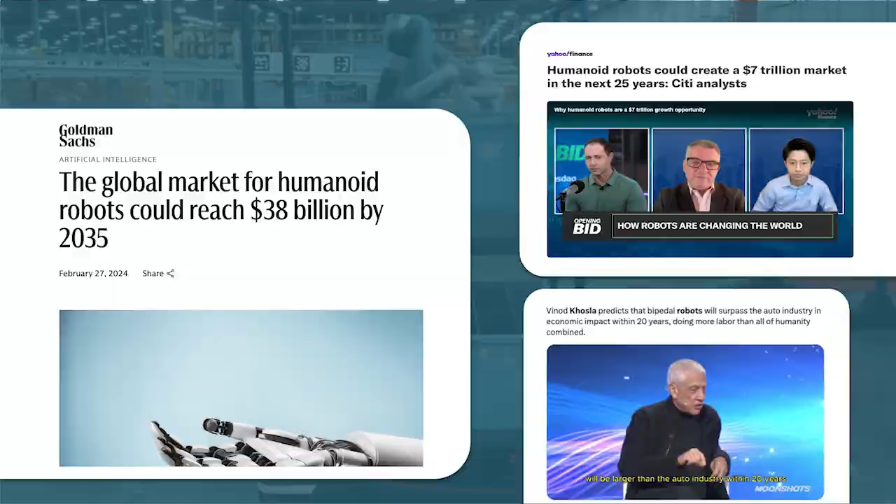So we basically spent a few years and looked at hundreds of use cases to find the right match between the technology that we knew was going to be generally useful in the world in some way, and a market where we're going to be able to make money at the very beginning - like a beachhead market, right, to get started.

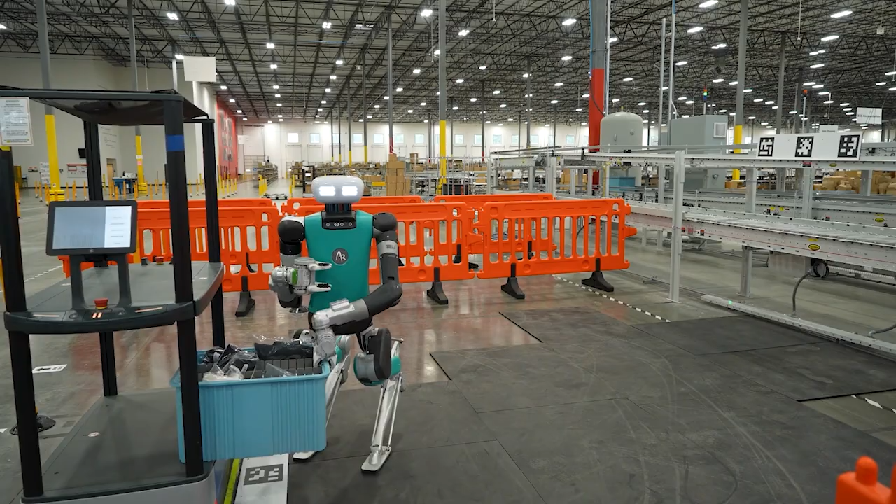And we found really that moving totes in warehouses is the right match. It's just something that a humanoid robot that we can build will do useful work now and early. And then this is kind of how we get started.

So humanoids are going to start in these industrial settings, and we'll talk about why - logistics, manufacturing, that kind of thing. And then quickly expand to other industries that are less structured, require a lot more generality in the perception, the intelligence, the decision-making, but also the manipulation, the locomotion, the mapping, navigation, everything else that it needs to do. And it's going to require safety - that's a really, really big deal, and we'll talk about that a little bit.

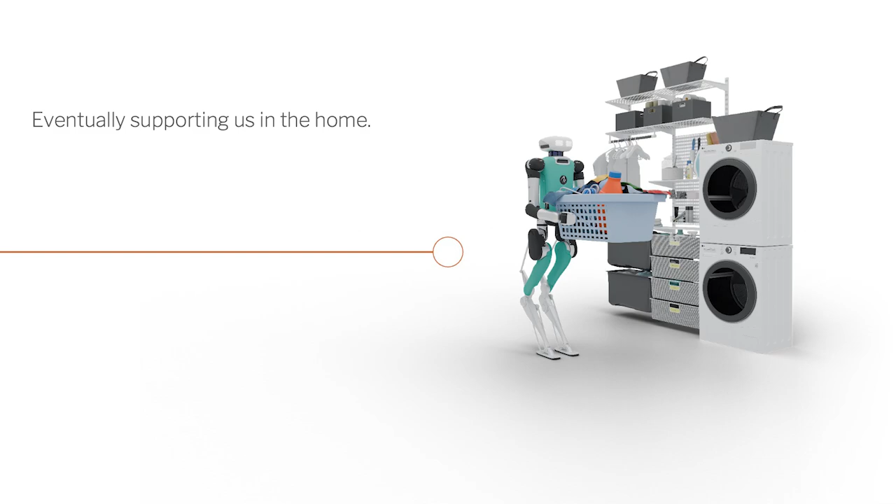Eventually we'll get in the home, but we're really not there yet. And I heard someone the other day say, until you can prove that the robot is not going to fall on a baby, it's not going into the home. So that's a pretty high bar. It's going to be a while, but we'll get there.

Just to be clear, the home is the very highest standard of safety, capability, manipulation - and maybe I'll say safety again. The warehouse is just how we start practicing that. Okay, so that's how the industry looks. That's how we see this opening up.

But about the robot - I'm going to talk about what a humanoid will look like that's going to enter this industry, and not necessarily just our humanoid, but kind of first principles, physics reasons why it, first of all, can look sort of humanoid and is useful for that reason, and what its features will be.

Similarly, I'll talk about what an embodied AI looks like, what the kind of structure of that AI looks like. And again, I'm trying to look at it from first principles. This is not just an engineered system that we built - it's how all of them will look, for reasons that everybody shares.

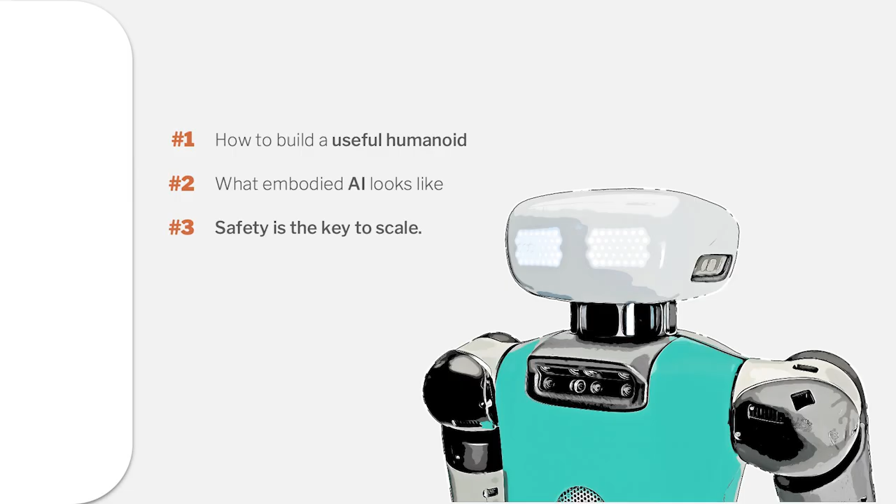And then I'll talk about safety and why you really have to overcome that hurdle before it's possible to scale. All right, so story number one: how to build a useful humanoid.

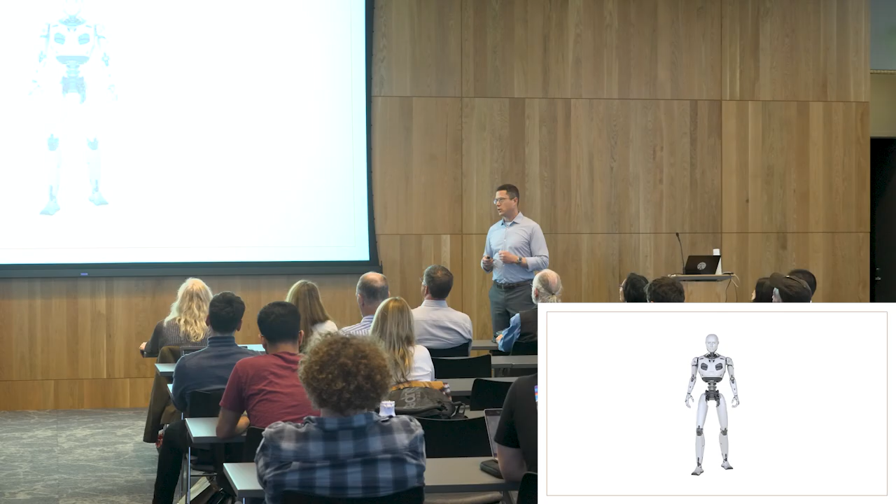It's not going to look like that. There is no reason to build a robot that looks just like us, and that is not what we're trying to do. We are trying to build a robot that is multi-purpose, that can operate in our spaces, that is human-centric. And because in the built environment there are so many different use cases and tasks and things you can do, the way the space exists, having a robot that's roughly our form factor, but more importantly can also follow the same workflows and do the same kind of manipulation - there's a lot of opportunities for multi-purpose.

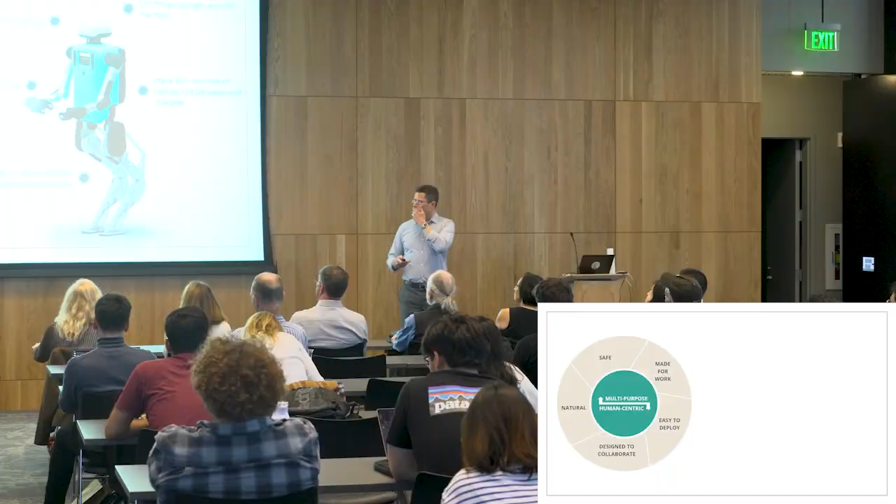It's a really big opportunity for a form factor like that to be multi-purpose. I can't think of another way that you would have a machine do so many different things, because we've designed the world around us. But when you really dive in and start to look specifically at what is it going to do - we talked about moving totes in a warehouse as a starting point - and then that leads us to some actual requirements.

So we're kind of spiraling in. This is why I said it's a match between the technology and the use case. You don't start with the use case necessarily, and you don't start with the technology. You end up trying to find that match.

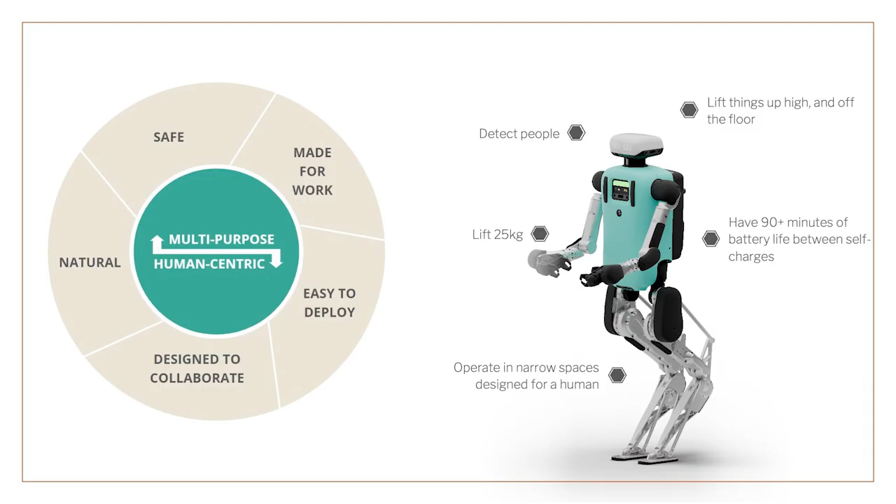So for this use case, we have to lift 25 kilograms — that's like the OSHA regulatory limit, which is what a lot of warehouses and factories use. We need to operate in narrow spaces, little aisleways, because a person can go there. And be able to reach up high.

To lift things up over about 6 feet high and pick things up off the floor, it's got to have this huge workspace, which is really one of the advantages of this humanoid. It's going to need at least 90 minutes of battery life between self-charging. And all of that starts to really constrain what the machine is going to look like and what it's going to do.

So the first thing is, if you're in a narrow footprint and you have to reach up high, it's going to need to be balancing — dynamically stable, just like people and animals are. A lot of robots are statically stable, like a table or a chair. The problem is, unless you've got a really big, really heavy base, anytime you lift something a bit heavy, the robot's just going to tip over.

But if you're balancing all the time, it's fine. You can get under it and change your center of mass to be underneath your combined center of mass with your load.

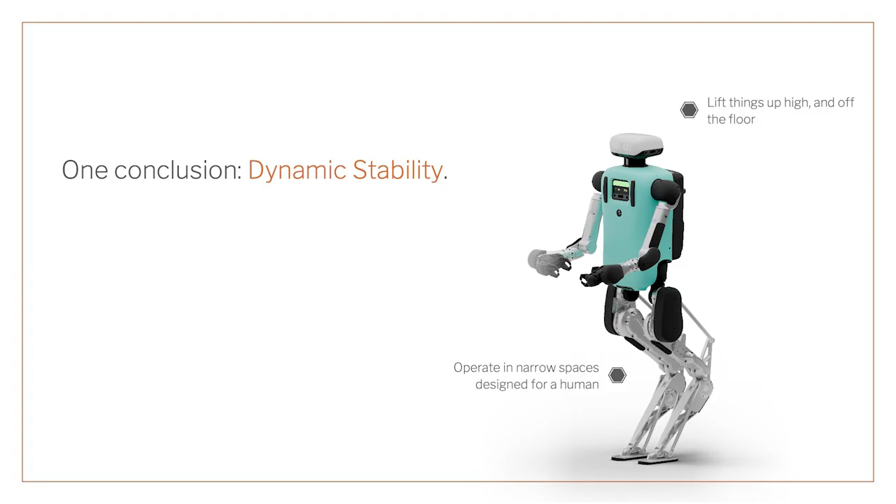Now, we shouldn't necessarily jump to legs here. If you're dynamically balancing, I think that's the thing I can convince you is definitely necessary. You can do it on wheels or on legs. But if you're doing it on wheels, like a ball bot or a Segway, you still have to be able to bend down and pick things up, so you still need kind of a mono leg or something like that. And you start to get close to the complexity of a bipedal pair of legs anyway.

Another interesting thing is that with legs, it's holonomic, meaning it can go in any direction from whatever position it's in. You can't do that on a Segway — you can't go sideways on a Segway. And on a ball bot, you have no yaw control because it's this tiny little contact patch.

Obviously terrain matters. Maybe it doesn't matter in this first use case, but down the road, for this vision of human-centric robots, yes, you want to handle stairs and things like that — that's a reason for legs. But what's really interesting is that legs are actually a lot more stable than a wheeled base, even for dynamic stability. Just imagine if any of you have ridden a Segway or hoverboard — do you feel more comfortable standing, or on a hoverboard or Segway, when somebody gives you a push?

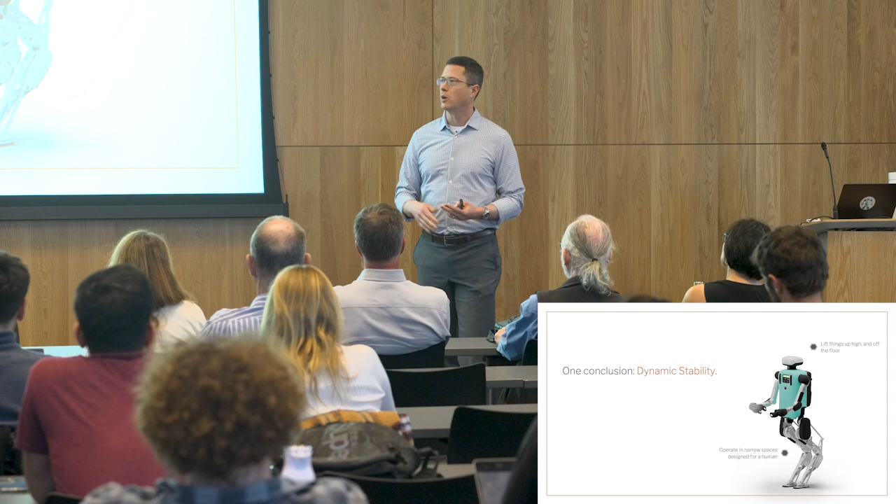The Segway has to accelerate on the ground to get that wheel underneath your center of mass. And if it just slips a little, or doesn't have quite enough torque, or hits a little bump, you just end up careening into things. That's true for robots too — I'll show later us pushing the robot around a bit.

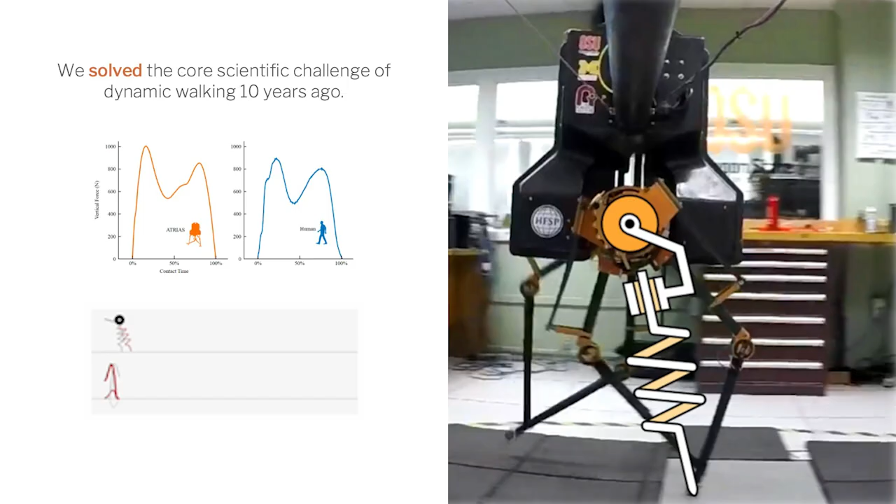So I think the hang-up for most people on legs is that they seem complicated. But honestly, that's just kind of a science thing — once you know how to do it, it's not so hard. This is what I was doing 10 years ago at the university. We were looking at this as a science problem, trying to find a math model that represents animals, pulled from the biomechanics community, just trying to understand the physics.

And we built this machine, ATRIAS — an acronym for 'assume the robot is a sphere' — and this is the math model. The robot is that math model, directly, literally, with the simplest controls you can imagine, stupid heuristics. But this is the first robot in history to reproduce the dynamics of a human walking gait, and that data is right there — that's the force plate in the lab, actually stepping on the force plate right there. You can't really tell the difference between a graduate student and the robot.

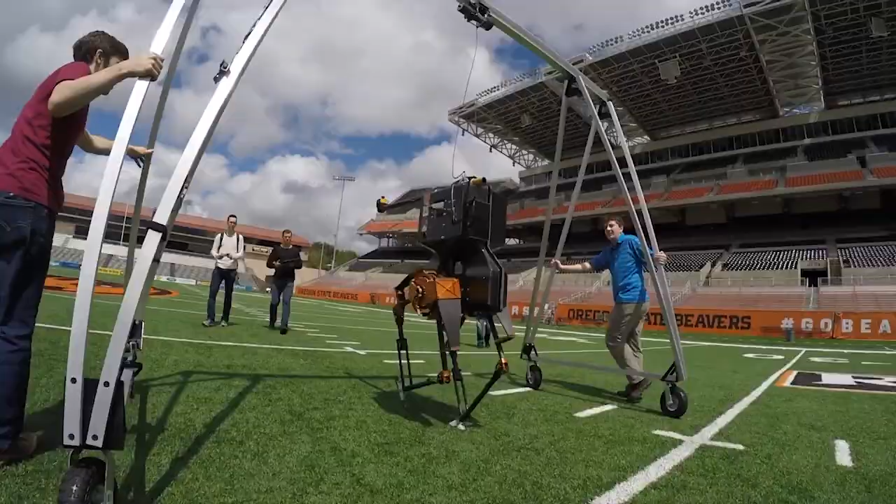So that's interesting, but that's just a symptom. The other symptom is that once we captured that, the robot settled into this self-stable behavior — we could take it outside, and it was very robust. There's no sensing, there's no planning. It's just moving the leg back and forth and bouncing in this self-stable dynamic behavior.

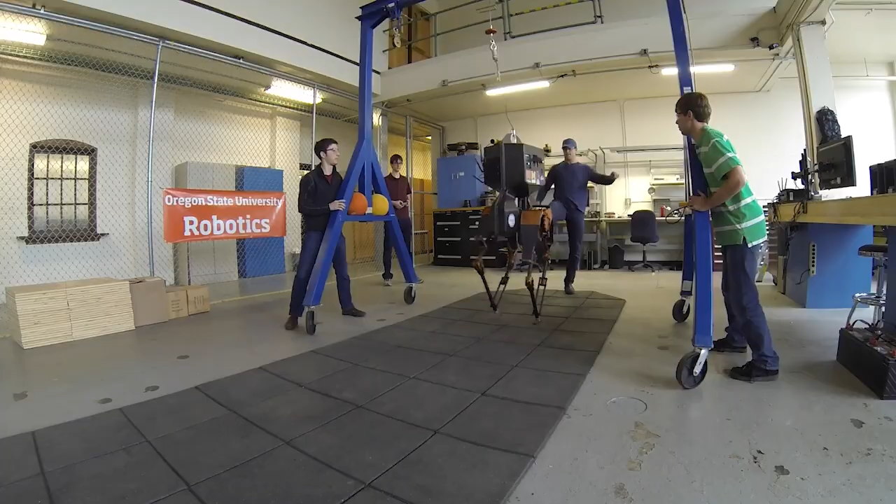And this is pretty cool. You can't predict that kind of foot placement right there, where it caught the edge of the foot and lifted up over the top, and still it just takes it all in stride.

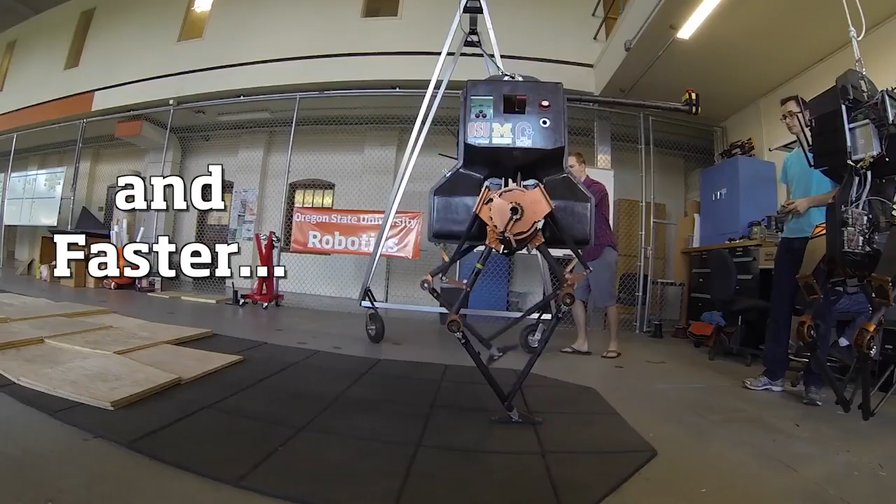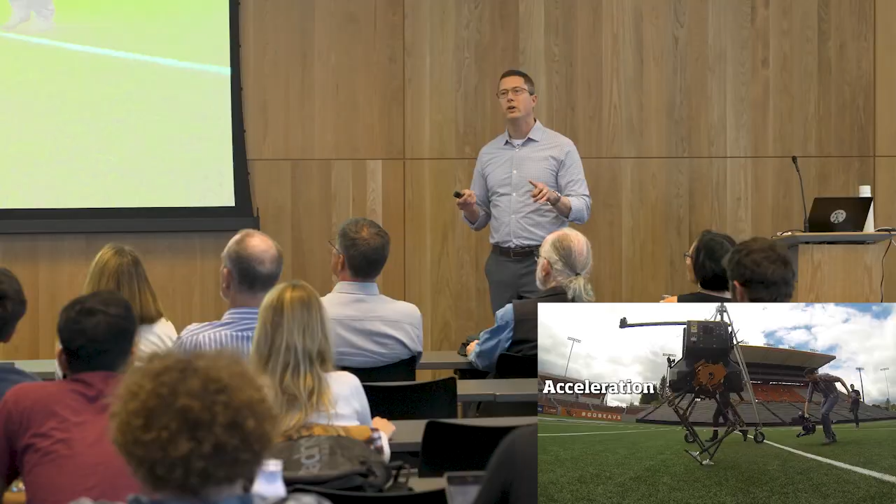So this is the foundation. When we did this, we said, okay, I think we know how to make robots get around in the world on legs, and robots are going to be able to go where people go. Now what's going to be possible when robots can go where people go? And this is when we founded Agility Robotics.

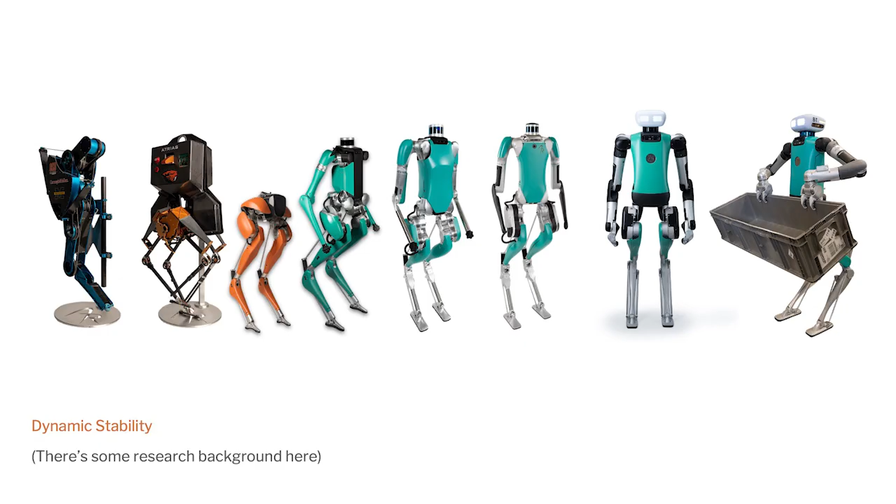So we've been doing some work since then. There's an evolution of robots up through Cassie, our first product that we sold to universities as a research product, and up through all the Digit robots.

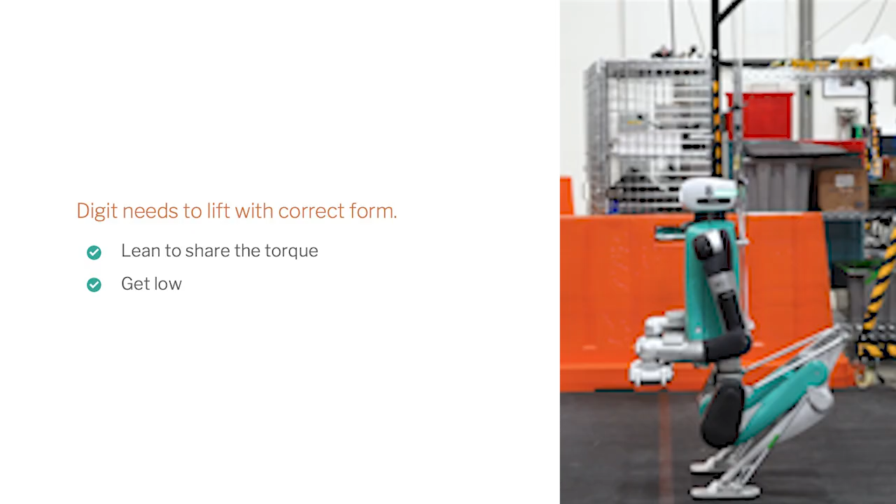And we continue learning. So this one's really interesting. We've just learned this, and I'll try to explain it, but it feels a little bit nuanced. Digit needs to lift with the correct form.

This leg configuration we have comes straight from the ATRIAS leg configuration — it's just a 4-bar linkage. For lots of reasons I won't go into, we ended up with this, but it's all first principles. It ends up looking a little bit like a bird, but we didn't do that on purpose. It's very good for mobility, and it's very good for simple control, because you just have one motor extending the leg.

It's really nice because you can walk up to a shelving unit and squat up and down, and nothing's in your way — the knees are kind of behind you. But all of the torque is on this one joint. This is the hip joint here, this is the knee joint here, this is like the ankle joint, or at least the analog to it. And then this we call the tarsus, this the shin, this the thigh. So it does have an analog to bird anatomy.

But if you try squatting up and down keeping your back flat like it's against a wall, you end up putting a lot of load on your knees, and you can't get down very far — it feels very weak. That's what's happening here. It's not something we really recognized until we noticed the torque was maxing out — we were getting around 80 amps, which is close to the limit of our power electronics.

What can we do? We realized, just like people do, if we lean the torso over and use that big motor we've got at the hip, we can split the torque between the hip and the knee, sharing that load. This works whether it's 2 links, 3 links, or 4 links — it doesn't matter the leg configuration. You'll just have to trust me on that.

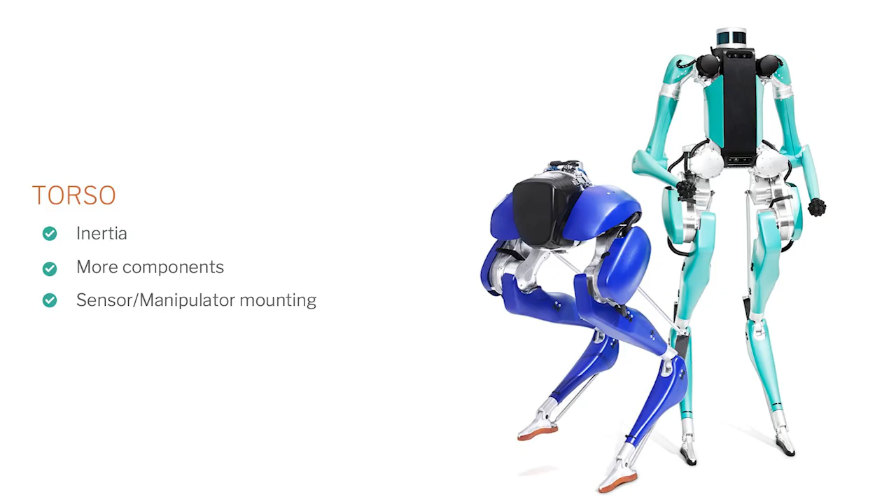The robot would twist when it was running, and the primary failure mode when it would fall is that orientation and velocity would diverge. It would step sideways and then fall over. We had little feet, so there wasn't a lot of control authority on the ground, and no other control authority at all. Plus anytime you jump or have both feet off the ground, the legs are most of the mass, so this little basketball spinning around, you just have nothing to react against.

We also needed to put a lot more stuff in there, more computers and more batteries. We needed to mount sensors on it. So we started thinking about spreading out forward, backwards, sideways. Again, we're operating in narrow spaces.

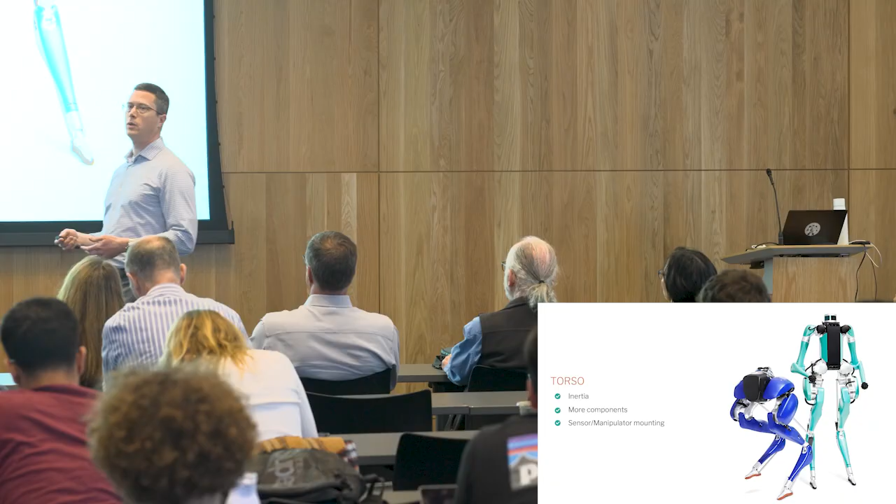The other thing is that having that torso on top is actually incredibly useful for starting up. How do you start? If you're on a Segway, you have to wheel the robot behind you so you're leaning forward, then you can accelerate. But with the torso like this, you don't have to step backwards like we did with Cassie. You can just lean the torso forward, and that allows you to accelerate in the direction you want to start going, or start stopping. So having the upright torso was really valuable.

Also, it's slower in how it moves, like balancing a broomstick versus balancing a ruler. So again, we're kind of pushed towards something that ends up looking a little humanoid. We now are bipedal, humanoid legs, upright torso.

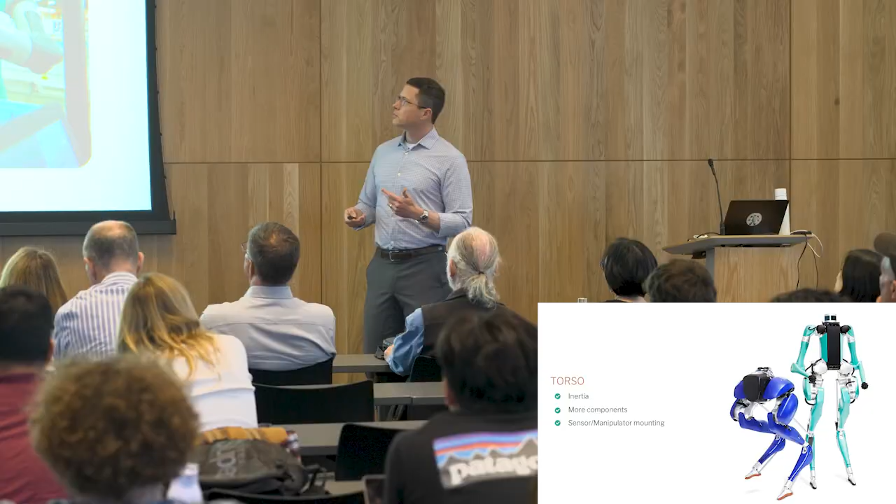Now, why do we put arms on there? We could have used an elephant trunk or tentacles or any number of things. There were three completely independent trains of thought that led us to mounting the arms where they are. I'll start with inertial actuation. Again, I mentioned we have trouble with yaw control, and the robot would twist sideways and things like that.

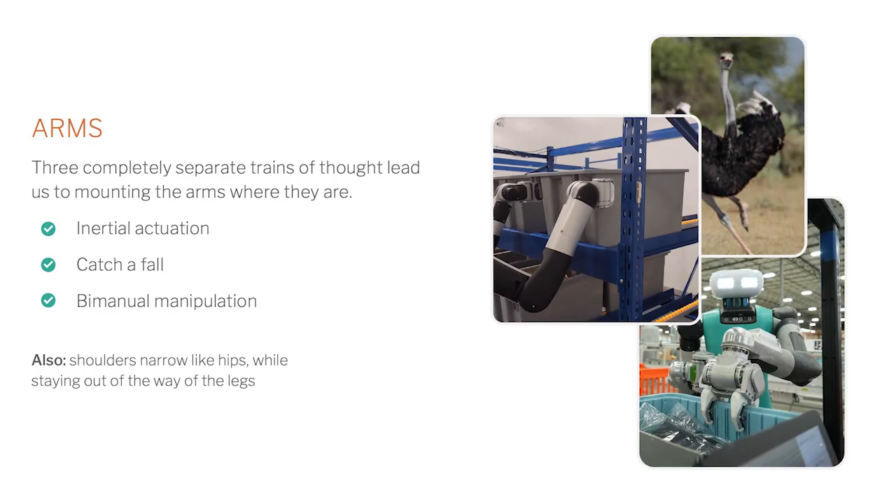We thought about adding a tail, like a velociraptor or something like that. But that tail is there so that when they jump, they can reorient their feet for landing. We don't need to do that. We need to control around the center axis. And it turns out if you use a bilaterally symmetrical pair of tails and do this, you can control yourself around the yaw axis perfectly and very cleanly.

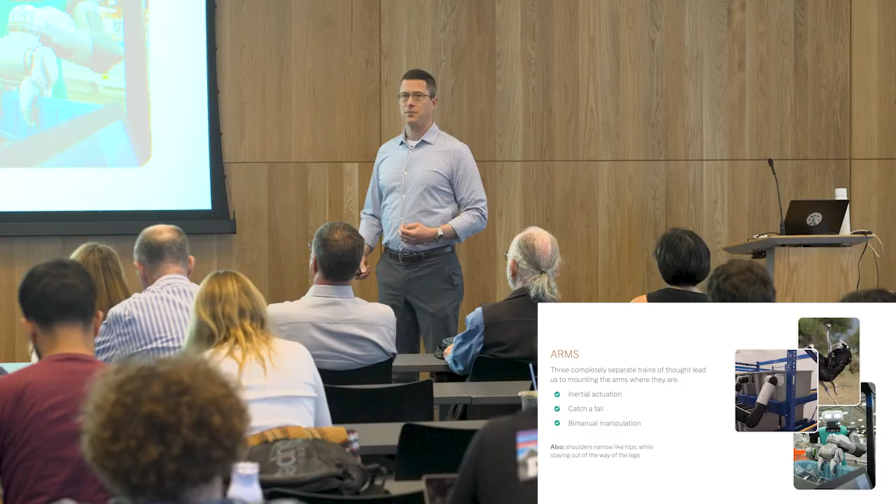The other thing you can do is this, and that's controlling your pitch. People windmill their arms in order to balance themselves. These are just right for giving us really good inertial actuation for our mobility and our locomotion.

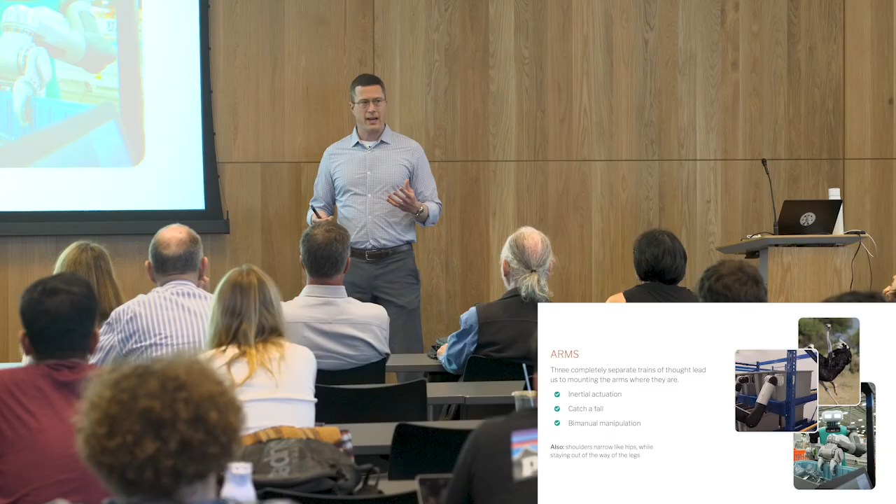Also, this robot is tall enough that when it falls, it doesn't matter what kind of shells you have on it. The padding needed to be like nine inches so that the G-forces would be low enough to protect the circuit boards inside. And that's too much padding. So we determined we need to be able to catch it with the arms to decelerate over that space. Now, where do you mount your manipulators so you have 360-degree coverage no matter where the robot falls? Well, these are a good location.

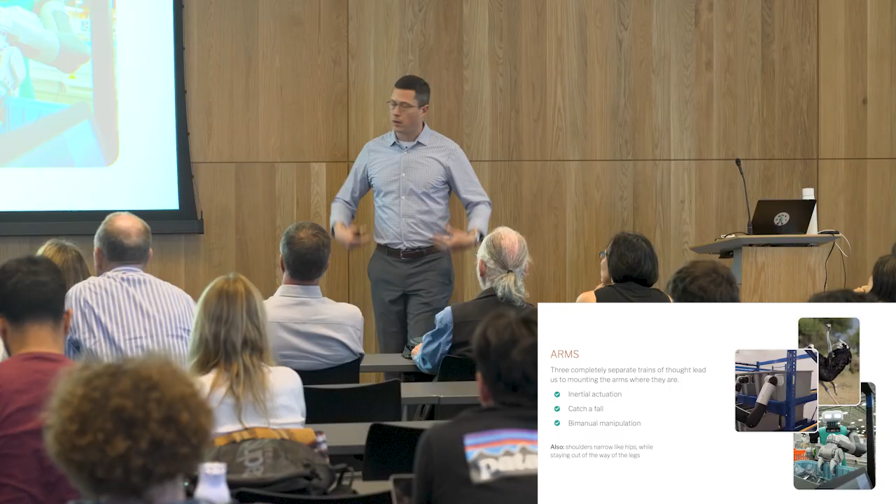And then, of course, bimanual manipulation is the third thing. We have the ability to pick up really big things that a single arm can't lift. Having the workspace and everything in front of you, where your sensors are, is really the right thing. And then we needed to keep them high, partly for the falling and the inertial reasons, and also to stay out of the way of the legs. So it all kind of works pretty well.

So now we're at bipedal, humanoid legs, upright torso, arms where a person has them, as we try not to build a humanoid robot.

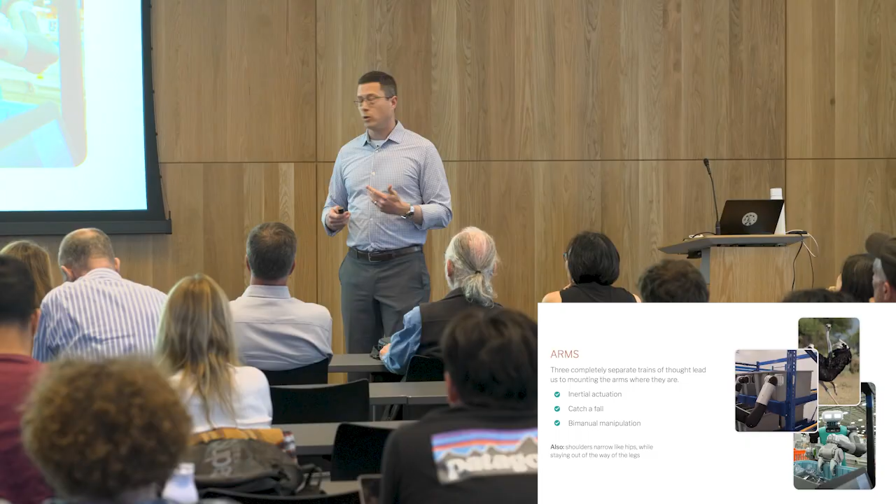The last step is we added a head to the robot. How could we possibly need a head? Well, a number of reasons, but one is industrial design matters a lot because these robots are human-centric. They're going into human spaces. They need to be able to communicate with humans. People are going to feel a certain way when they see this, and they're going to have expectations of the robot from the first half second of seeing it, and as they interact with it.

When it doesn't have a head on it, people think it's headless. Obviously this thing doesn't really need a head, but it looks headless. So that got us thinking: what can we design so that it doesn't look headless? Maybe it could be like a Monsters, Inc. kind of monster. But it turns out our sensor LiDAR is right there, we needed antennas and other things above the LiDAR, and we needed some cameras to clear the shoulders. We ended up with a head.

But now we're also able to have a really intuitive interface so that even though it doesn't look like a person, it's a very simplified thing that can indicate that the robot is on, and which direction the robot's about to go. I've heard that the eyes lead the action by something like two seconds in people and how they move around.

It's also just about general awareness. When the robot is standing, a lot of people think of it as an inanimate object. They don't really register it unless they think about it as something alive. It's like a table or a chair, and then when it moves, it surprises them. That surprise is how you hit the uncanny valley, and you lose trust, and people don't like it. So you don't want to surprise people. Having the eyes blink and a little bit of motion all the time really helps with that — people register it as a thing alive that might move anytime.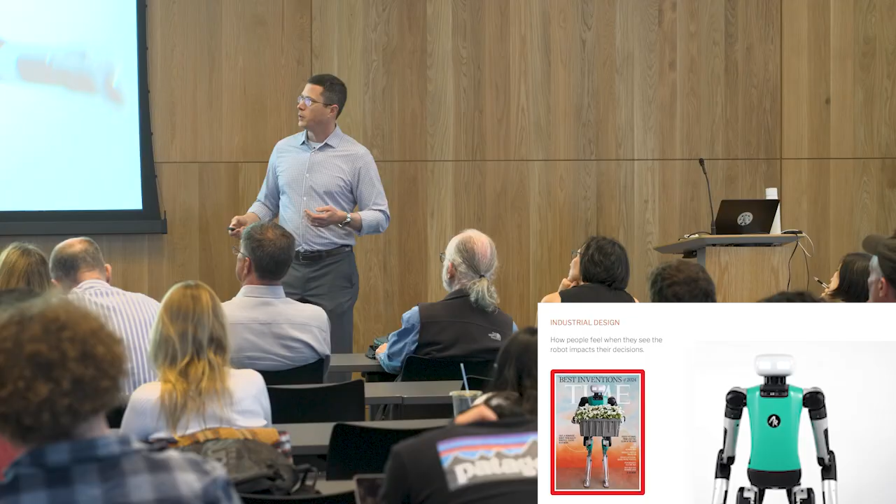I think industrial design is why we get to be on the cover of Time magazine and things like that. So it's really important — it influences people and how they feel.

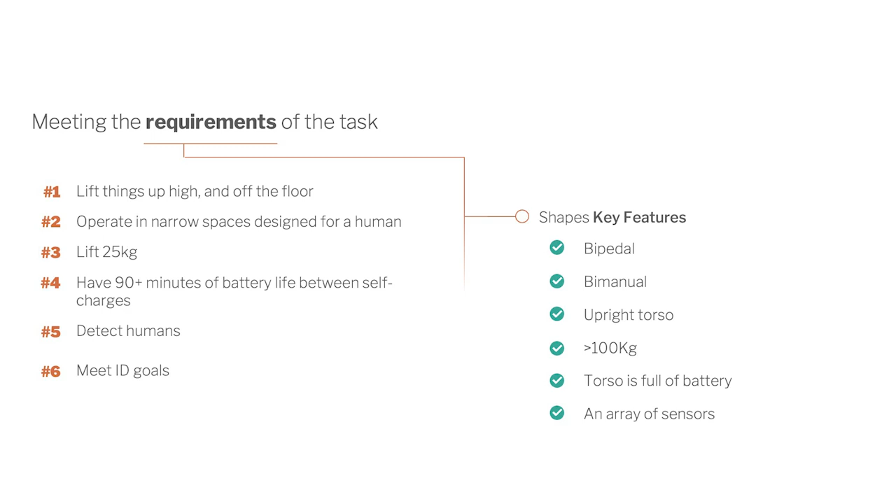Okay, so to wrap up that section: to meet the requirements of the task for the only rational beachhead market for humanoids, we need to lift things up high and off the floor. We need to operate in narrow spaces. We need to lift heavy weights. All of that sends us towards bipedal, upright torso, bimanual, a heavy robot — because if we're lifting 25 kilograms and have 90-plus minutes of battery life, and we've got to lift these things up high, it's a sizable robot. It's going to be over 100 kilograms.

It also turns out that the torso is mostly full of battery — there's not a lot of room there for additional actuators and other things. It's like 80% battery. So in order to do these things, we will not be doing backflips with our robot. It's a very different purpose.

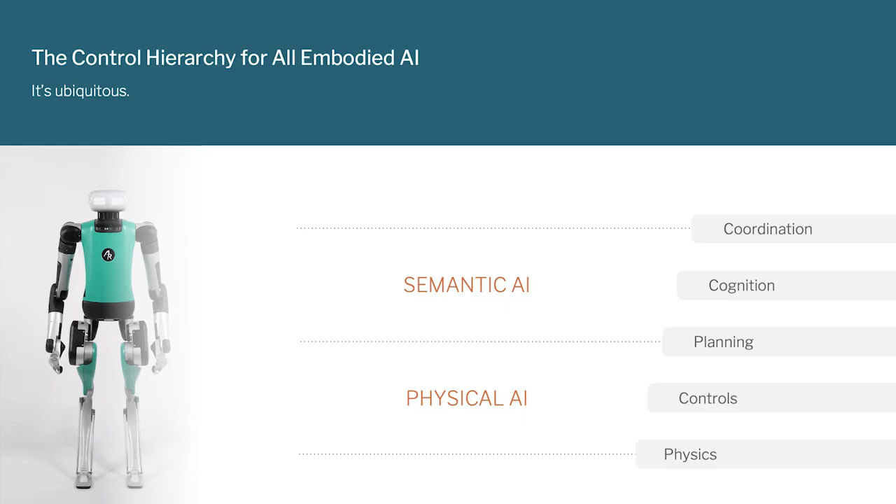All right, story two: what does an embodied artificial intelligence look like? Most of the time when people think of AI, I think they're talking about a semantic AI, like ChatGPT or something like that. And that's because this is just a new surprise in robotics. Even when we started Agility Robotics, we were really focused on physical intelligence — the controls, the dynamics of the hardware, making sure the hardware enabled even the possibility of controlling it to do the things we wanted it to do, and working our way up.

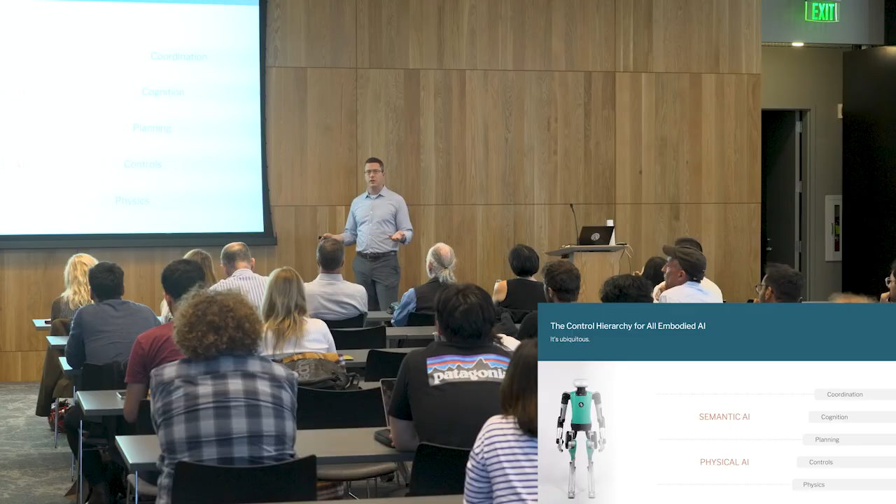I thought it was going to be decades before we'd have the intelligence to know what a light bulb is and have some context around how you might reach for it. And then language models just came out of nowhere, at least from my perspective, and I think from a lot of people's perspective. All of a sudden this kind of semantic intelligence is a commodity now. We can hook up to any one of a number of open models and have our robot understand human context and what's going on in the world. So that's a real accelerator, and that's very, very cool.

But I want to point out the difference between semantic intelligence, which is like the brain in the box — it can output things like IKEA instructions for how you'd assemble a piece of furniture — and physical AI, which is a thing that says, I have 50 degrees of freedom in my device.

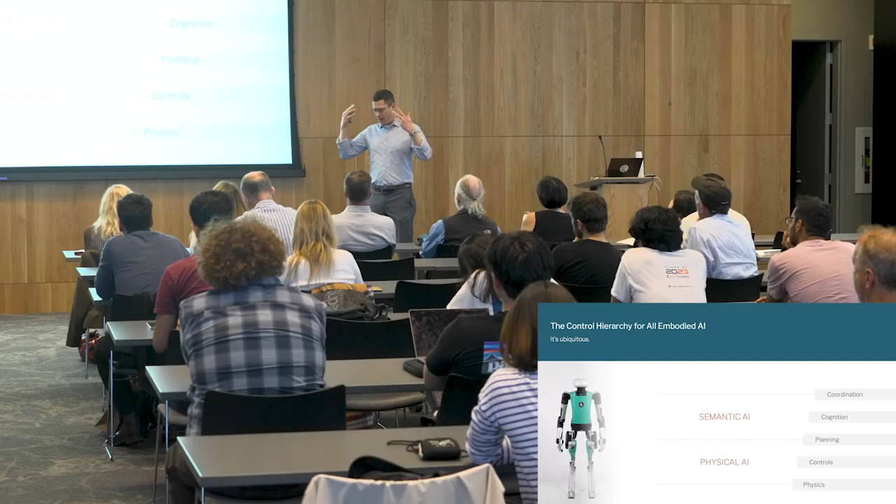How do I actually grasp a screwdriver, apply the right forces, the right impedance control, screw the screws in, and follow the instructions that are provided by the semantic intelligence. Most people are ignoring this part. Most of the big companies that are really doing AI are up here in the semantic AI, which is fine.

People are starting to notice this, and we're working on it, so we'll get there. To break it down a little bit more, I think of this hierarchy where there's the physics at the bottom. This hierarchy, by the way, is sort of differentiated by how fast something happens. So in the physical realm, it's faster than, say, 2 kilohertz.

It's things like impacts with the surface. And way up here at the top, it's like, where do I need to get to on Stanford campus? Or how do I make a pizza? Or things like that, which once a second, once every 2 seconds is fine. You can be updating things like that.

And also the amount of information, right? So that sort of context is the entire published content of the internet and all kinds of human context and awareness. But down here, for what happens when I make impact with the ground, you need almost no information. And so those two things, kind of those 2 inverted triangles, determine this hierarchy. And importantly, they determine the appropriate tools that can be used in order to solve the problems at that layer. So I'm going to walk through each of these.

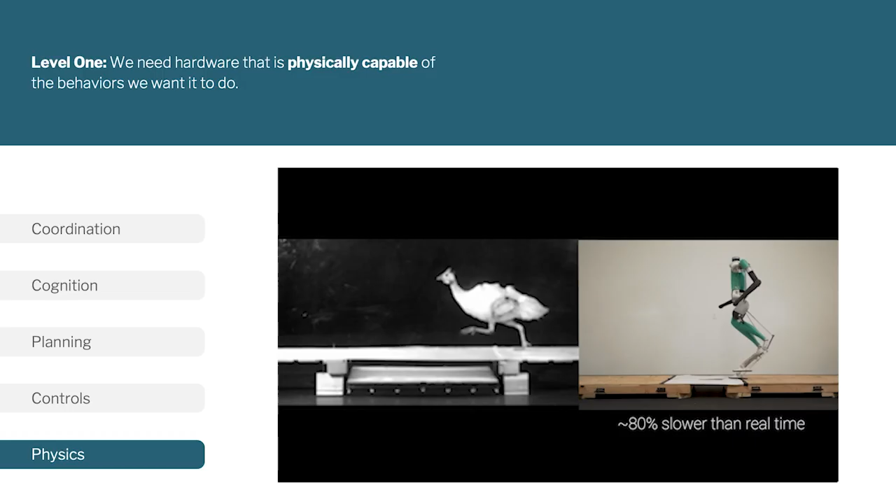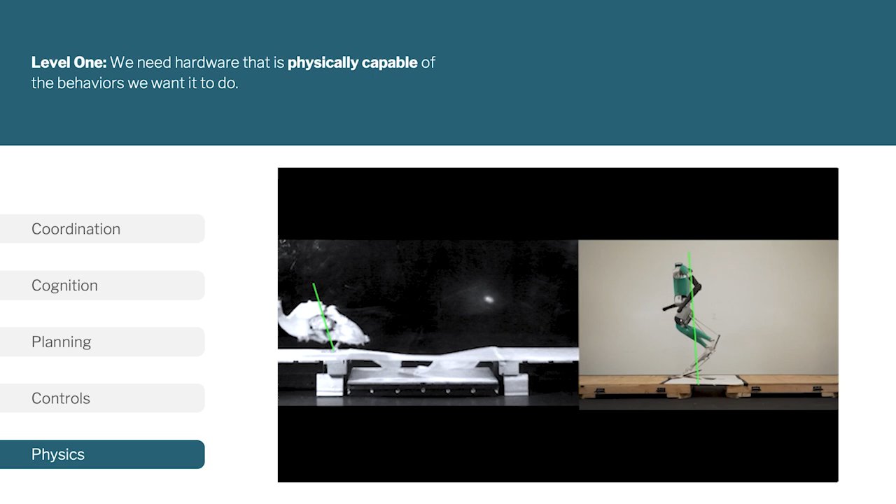OK, this is an example of what Digit can do because of its hardware. And in comparison, some early work—this is a collaboration I was doing with Monica Daley at the Royal Veterinary College. The bird, of course, ran down this runway 100 times and stepped on solid ground. Then this time we surprised it, moved the force plate down and put tissue paper across the top.

So then we say, OK, what happens? Well, the bird hardly even slows down. The foot just extends all the way to the ground, and then it keeps going. This really indicates a measure of force control and compliance. So at some point, the bird just said, OK, I want to apply some force to the ground. It doesn't matter where the ground is or when it makes contact—it's going to make contact at some point and then keep going.

That's where you get this incredible robustness to whatever the terrain is. You don't have to think about it too much, and it's sort of self-stable as part of the dynamical system. Well, Digit can do that too. We just wanted to show here that—I don't think the perception is even on here, but at least visually we can show you that the robot can't see that there's a hole in the ground.

Still, we have some very good actuators right there that we can do very high bandwidth force control with. We place the foot on the ground, we say OK, start applying force. If the ground isn't there, it just extends the foot into the ground until it does make contact. So, you need the hardware to even enable the force-sensitive controls, even if it isn't a position-based thing.

All right, stepping up then to controls. This is coordinating all the individual joints, like coordinating the ankle and the knee and the hip and the elbow and everything else.

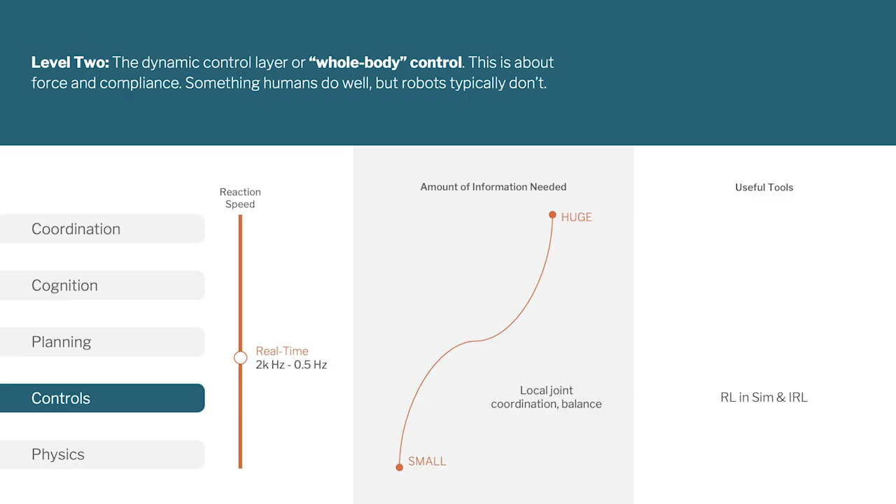Balance and joint coordination necessarily has to be learned in simulation, eventually in real life, because every robot you design with good old-fashioned engineering is unique. You have to think about what is the right answer for all 50 position sensors and your inertial measurement unit and other things, take that sensor input, and then calculate the torques you should apply to every one of your 50 motors, 1,000 times a second.

There is no example, there is no source of data, there is no right answer. You have to invent that right answer and create it. So the only way to do that is to explore, and that's what reinforcement learning is doing. I think it probably takes too long in real life and breaks robots, so you have to do it in simulation. Eventually you could do the final refinement in real life, but I don't think the community has really started doing a whole lot of that yet. This can't be done with data, with teleop, or with extraction from video. It has to be done with the unique dynamics of the robot, explored in simulation.

Here are some examples of behaviors we had to learn. This is the one I told you about, where I think it's quite a bit more stable than wheels. You can see the robot doing some interesting things — it sinks down and gets low to the ground. This is not a model-based controller, it's just trained through exploration. The model of the ground is very poor, so this could be different surfaces, or whatever weight it's carrying in the bin, it needs to be robust to all of that. This is very clearly the future of control for dynamic behaviors — doing reinforcement learning kinds of things.

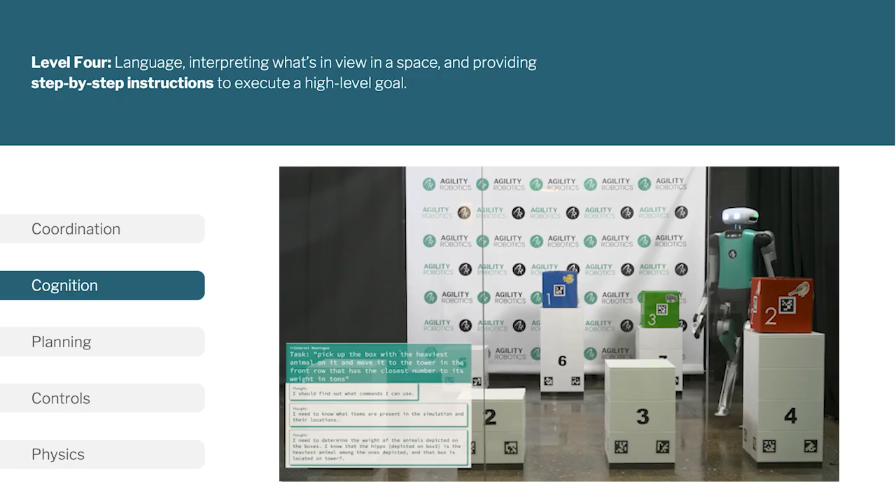Language models, vision models, the entire published internet. Here's a demo of that where you can see the train of thought. Pras over here was talking to the robot, said, pick up the box with the heaviest animal on it and move it to the tower in the front row that has the closest number to its weight in tons. A little complicated.

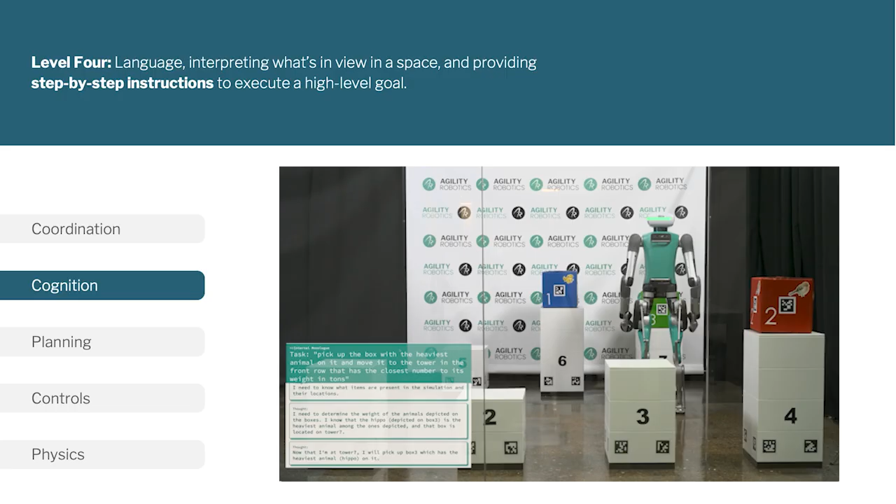I need to know what items are present. I need to determine the weight of the animals depicted in the boxes. I know that the hippo is the heaviest animal, that box is on tower seven. It's going through this whole semantic train of thought, and then it's basically programming the robot to go here, grasp here, pick this, go there, place there.

This was just a couple of weeks kind of thing to put together, to stitch a commodity language model and commodity perception model onto our robot's physical intelligence and the ability to balance, move, and plan.

Powerful. We're going to have hundreds of robots, then thousands, then millions, and they all need to coordinate. People coordinating as teams is a lot harder because we don't have Wi-Fi, but robots do. So we'll be able to coordinate all the different humanoids with the AMRs, with the warehouse management system, and with the people working alongside these robots.

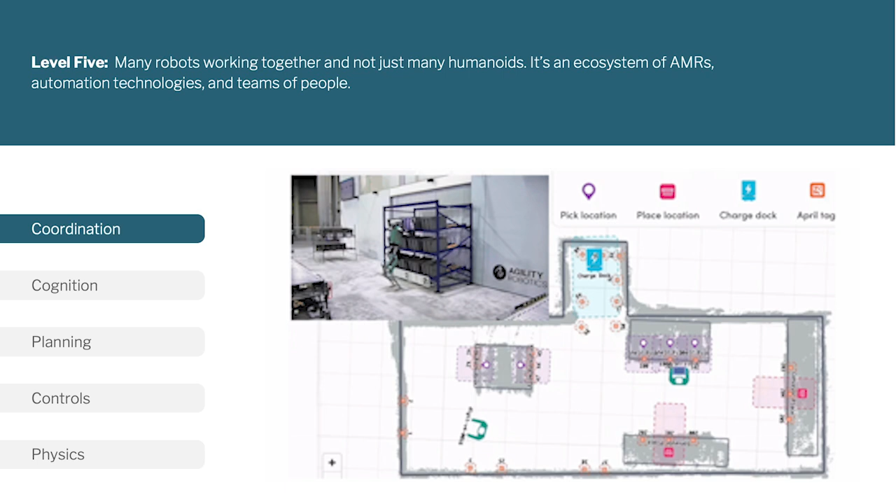This picture is Agility's ARC software, the whole fleet management coordination software for deploying these robots in warehouses. Coming back to bring it all together, we've got the different layers. They happen at very high control rates, thousands of times a second, down to much slower thinking about things. Different tools: cloud, language models, learning by demonstration, reinforcement learning and simulation, then final refinement in real life, and actual hardware design.

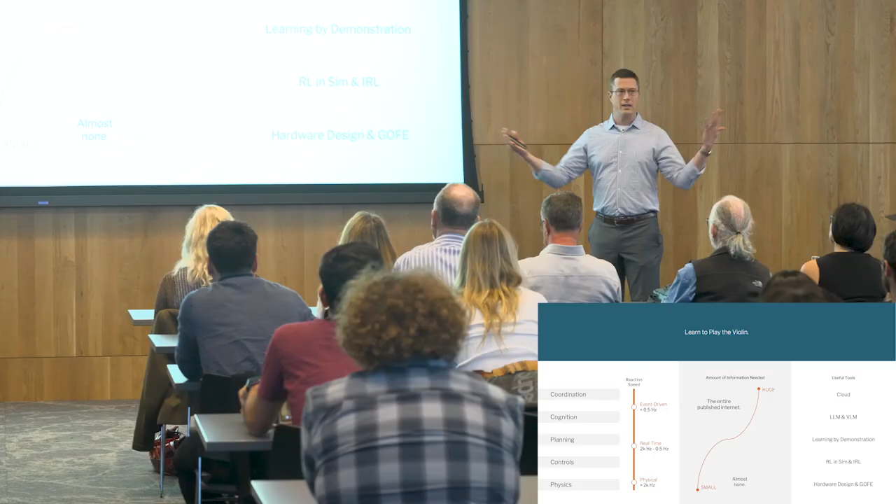There's a couple of really beneficial things about it. Before I get to that, think about learning to play the violin. First, at the foundation layer, you must be able-bodied. To actually play the violin, you need all of your fingers, you need to be able to reach around the violin, you need good hearing. There's a lot of things you need as a foundation to be able to play well.

The next step is your teacher teaching you how to hold the bow and the instrument. But if that's all you've got, you're going to be a terrible violinist. You might be able to make some noise and do the very first things. But to get good at it, your teacher tells you what the answer should look like and sound like, and you can watch recordings of what it should be.

That's your cost function. Now you need to do the reinforcement learning, which is the practice, practice, practice piece. You have to explore the relationship between your own body, the tendons, the force sensing, your neural connection, the fat pads in your fingers, all of this nuance in how to get your body with your instrument to sound close to the way you want it, the way your teacher is helping you. So practice, practice, practice, learning by demonstration, and then up here is your broad awareness in the world—why do I want to play the violin, what is a performance, and things like that.

And up here on the cloud you're playing in an orchestra. You've got an orchestra conductor, you have all these other instruments and teams that have already gone through their own stacks and different methods in order to do this. So I guess all this is to say, I fundamentally do not believe in pixels-to-actions learning, where it's just a big black box, the silver bullet magical AI that solves your problem, and now your general foundation model can control all robots. I do not believe in that. I believe these are very, very powerful tools. I think it's important to use the right tools in the right place. I think robots are always going to be a large engineered system. We're just going to have more and more powerful tools to engineer them with.

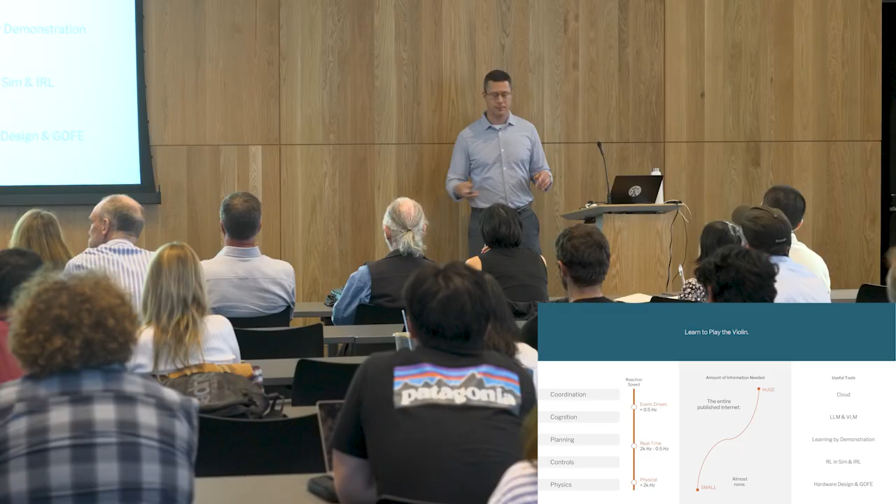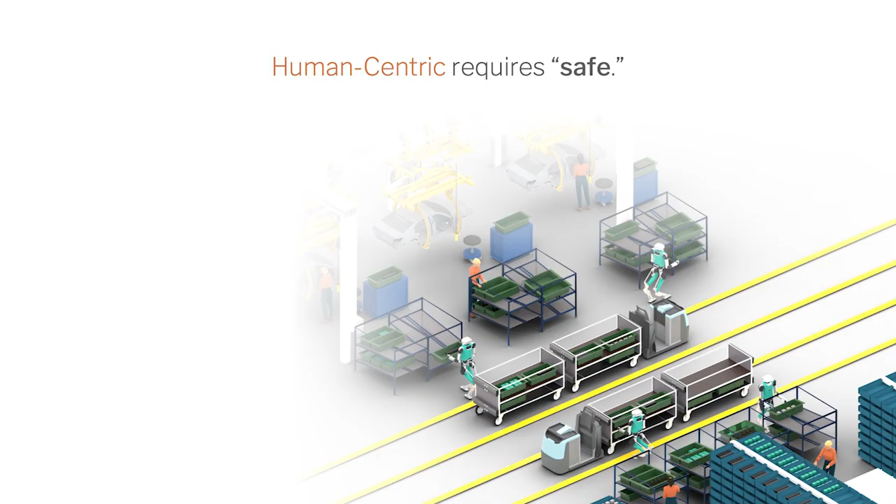All right, so finally I'll end on story number 3: safety, as really the key to scaling all of this. The point is that no matter how capable your robot is, no matter how sophisticated, if it cannot operate safely around people—and I mean safely in a provable way, not just something where you're like, yeah, I think it's pretty safe. Because I'm that way now with our robot, and I get in trouble all the time because I want to go touch the robot and mess with it, and they're like, stop, don't do that, it's not safe, you're showing other people that then they want to do it. I understand. We actually have a lot of robots now and a lot of people, and they are heavy, they are 100 kilograms, and at some point there are pinch points, there are all these things.

We have to prove that these robots are safe. We can't just ask people to judge it, because if they're going to go in a home, they're relying on us to tell them that they're safe. And safety is less exciting for most roboticists than, you know, making them do backflips and things, which is cool.

Safety is really, you have to be so thorough in order to go through every pinch point, every risk of how your toe might be crushed, or it falls and slides and runs into you, all of these things. And typically, they're not going to take your word for it. You have to go through this hazard and risk assessment, and it needs to be validated by a third party. There's companies that do this, like TÜV Rheinland and others. And usually what happens is somebody solves it the first time, and it's like a 150-page document that goes through every possible thing that could go wrong and how they're mitigating every single possible risk.

TÜV Rheinland goes through that extensively, and it costs millions of dollars to have them do this. And then they validate and put their stamp of approval and say, yes, they have a plan to mitigate these risks. And then, through additional committees and years and everything else, that becomes a regulatory environment. Someone solved the problem and showed how to do this safely, and now there's a regulation that everybody can follow, and then insurance companies and everybody else understand the risk that they are taking.

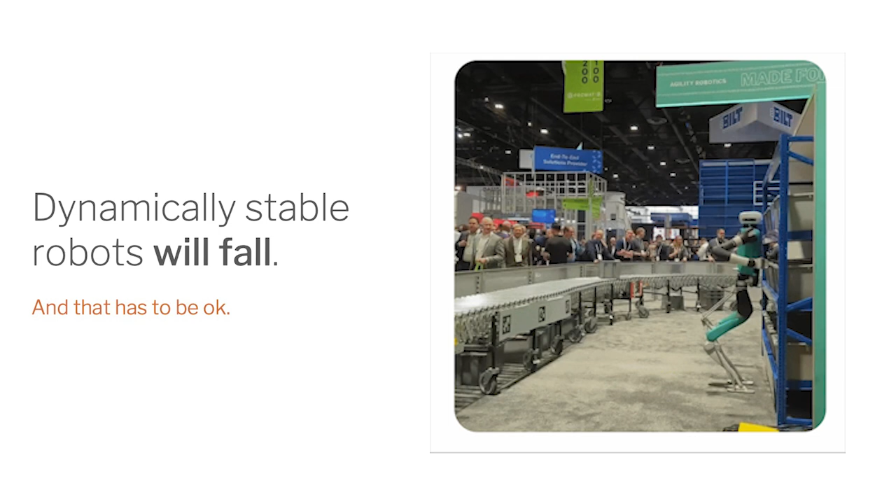So that's what we have to do, and that's what we're doing. Now, we talked about this—dynamically stable robots are going to fall. This is unavoidable, and certainly we do it a lot. It has to be okay for the robots to fall, and not just avoid damaging the robot, but if you were laying on the floor right under it—which, when there's 1,000 robots out there in people's homes, that kind of thing's going to happen—that could cause injury.

But there's also judgment errors when you have robots in more general environments. You see the robot bringing you tea. How do you make sure that the robot doesn't pour hot tea in your lap just because it made a mistake about whether the tea was hot or not, or had a weird sense of humor because it's an LLM and who knows what it's doing, right?

Or it's time to do laundry and the puppy was in the dryer and the robot didn't realize that. Man, it's hard to prove that you're not going to make those kinds of errors or mistakes.

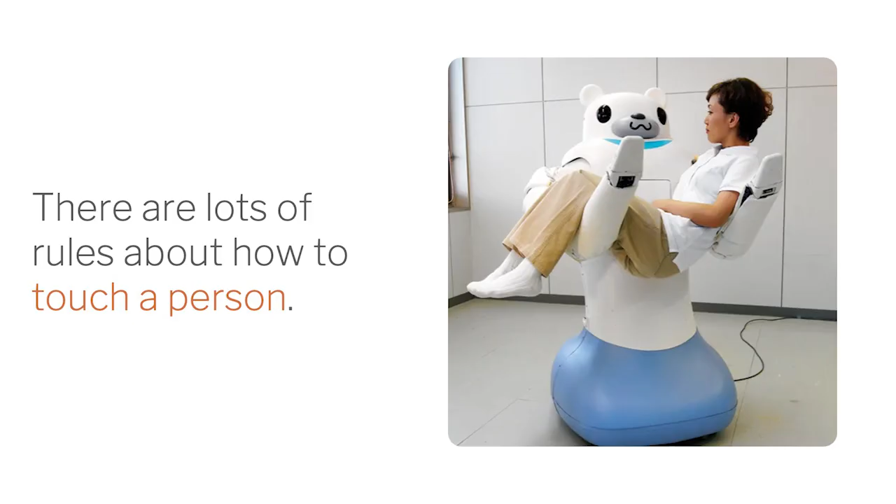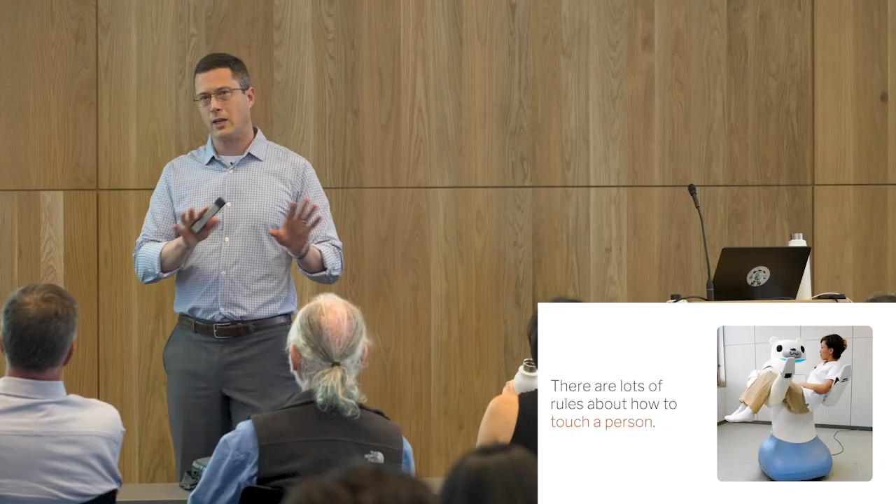Remember that these robots are strong enough to do useful work in the world. And just like other people and pets and things like that, that amount of force is enough to cause harm and danger. So when you're in your friend's home and there's a really big dog, you are trusting your friend to know that dog, and you're trusting the intelligence of the people and the animal around you to know what touches are appropriate, what aren't, and what behaviors are okay. And this is even aside from things like, is it okay to hug somebody? This is like basic safety kind of stuff.

I don't know how to solve this one. Cobots don't fall at all right now. Cobots are bolted down and they kind of limit the force that can possibly occur in an industrial setting. But a balancing robot, it's not possible to do that. They can still fall. So today, in order to deal with that, what are your choices? You can either limit the speed and force, which again, we can't do with a balancing robot, or we have to separate them from people and have physical barriers, which is how we get these into the warehouses at the very, very beginning. And that's not scalable. You can't put a cage in a cell around these things.

Then why are you doing a humanoid robot? The whole point of a humanoid is to be human-centric and get into human spaces. So how do we do that?

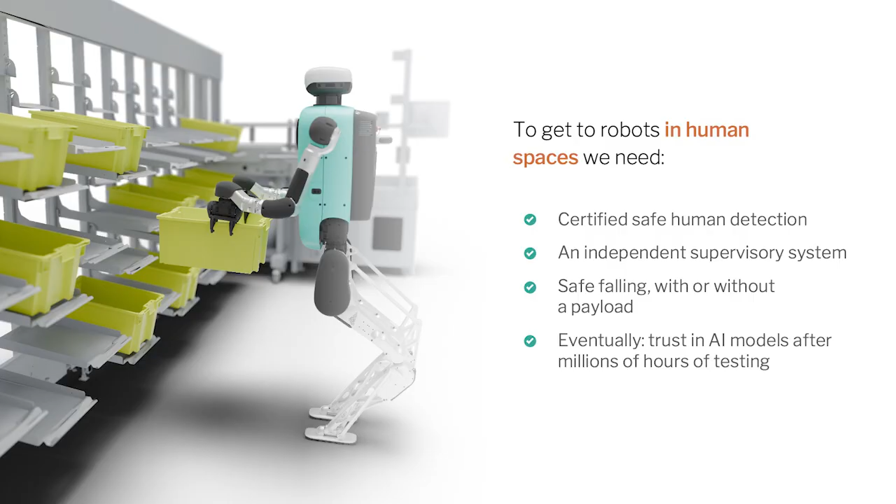To get into human spaces, we have to be able to detect people. And I mean detecting a person, like a person is standing next to their identical mannequin, and you can tell the difference between which one's a person and which one's a mannequin. We need an independent supervisory system. So there's a system on the robot that's completely separate from the whole robot controller that is observing it, making sure it doesn't break any particular rules or do anything out of the ordinary, and it can take control of the robot and shut it down safely at any point that it decides to do so.

We need to have it fall safely, even while it's carrying stuff, figure out how to do that, not fall downstairs, for example. And eventually, we're going to have enough trust in AI models after millions of hours of testing that we are going to trust the judgment of these things in order to not fall on a baby, in order to touch us in only the appropriate ways, use their strength in ways that will never cause damage, have robots that are actually helpers and allies, and are smart enough to do that. But it will be a while.

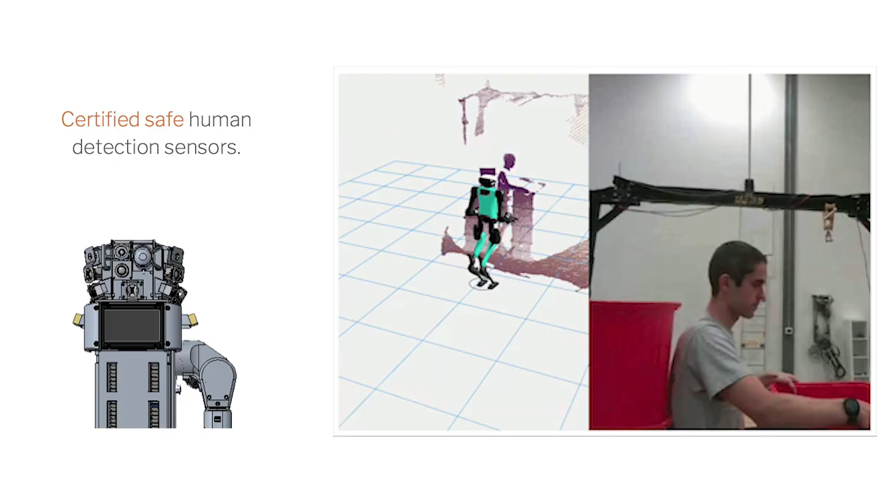This is an example I want to point out. So in this scene, here's a person standing next to a stack of things, and a LiDAR or a depth camera. You can't tell anything. One of these objects you need to apply 50 pounds of force to because you're going to lift it, and one of these objects you're not allowed to touch. So how do you do that with like 99.999% reliability with a robot?

Well, we're putting these human detection sensors on it, and it's this array of RGB and IR sensors, and you can see there's this epic array of sensors on the robot in order to just even get started on doing that. So when you see a humanoid robot and someone says, this is going to go in the home or this is going to go out into the world, look for an epic array of sensors, because that is a requirement. It is necessary.

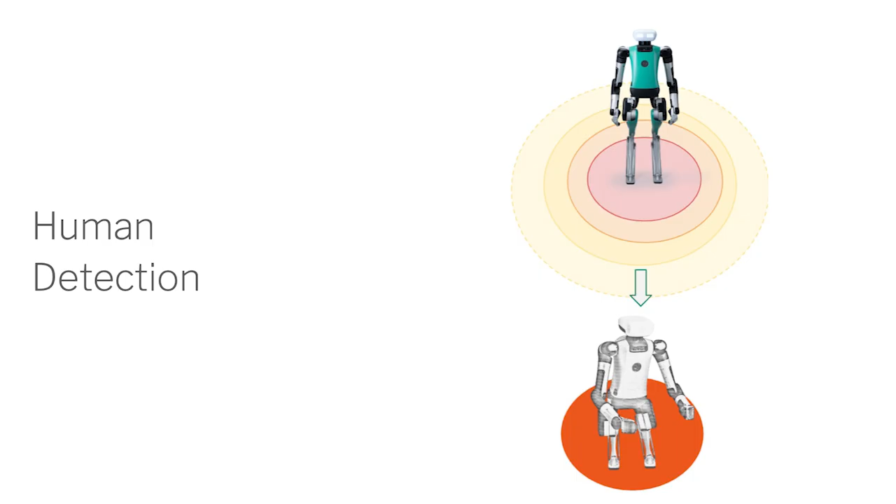Now, once you detect the person, you can choose the behavior. Right now, before a person can get to it, the robot will sit down. So the robot can slow down as a person is getting closer and be in a lower and lower energy state until the point it actually makes physical contact. It's in a safe state by the time the person gets there. That's the only way we're going to walk down a hallway and coexist in human spaces, even though we can't necessarily be right next to people at the very beginning. Nobody will be able to. This is the kind of thing that TÜV Rheinland, insurance companies, et cetera, really mandate this kind of approach.

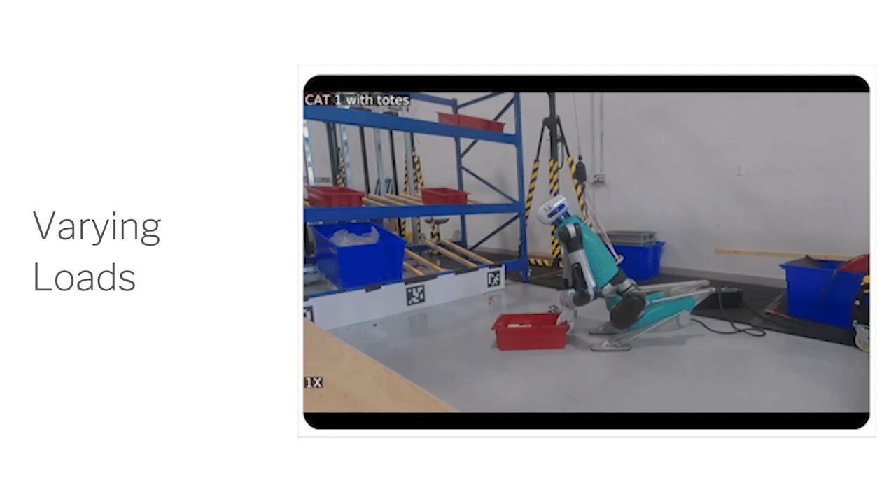And then we talked about varying loads. We carry a lot of different things, a lot of different kinds of totes, a lot of different things in the totes. We've got to get down on the ground safely, so we have some approaches to do that.

Eventually we'll trust these AI models through millions of hours of testing. And that's going to only happen once we have hundreds of thousands of robots deployed in warehouses, then commercial environment back rooms, and then very gradually getting our way out into more and more unstructured, more and more public spaces.

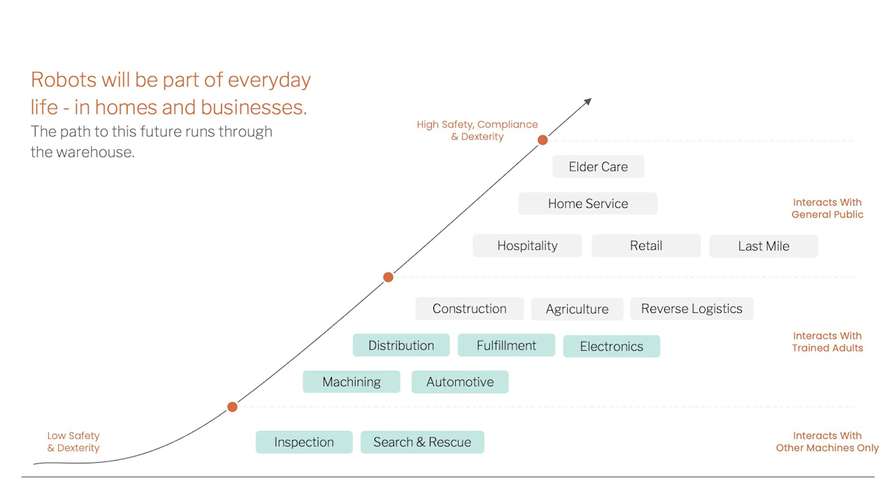If you say in-home robotics is going to be a huge industry, sure, but it's also going to just be hundreds of billions or trillions, who knows how big the market is on the way there. We could just be moving bins and totes in a warehouse and have a company worth billions just doing that task. Or we could probably have 5 or 10 companies worth similar amounts doing just that task. It's such a huge market.

And then we get out to just doing cardboard boxes, unloading tractor trailers and things like that. There's so much to do on the way towards really impacting our whole economy, practicing with these robots, and eventually getting them just part of everyday life, which is so cool.

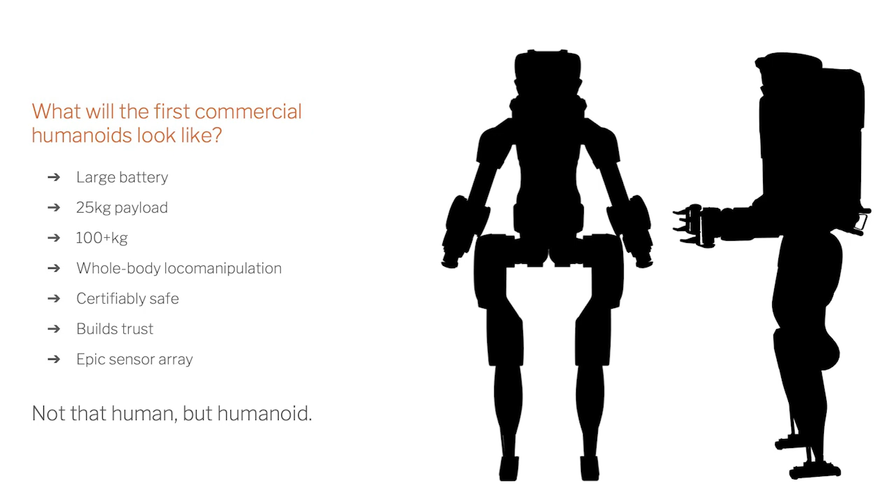So to answer that question, what are the first commercial humanoids going to look like? They're going to be heavy, over 100 kilograms. The battery is going to fill up most of the torso, and the torso might be kind of chunky. It's not going to look just like a person. I don't know why it would, but it will be bipedal. It will have an upright torso.

It will be bimanual, and it will have some cues that allow people to interpret the robot's intent and what it's going to do, so you don't have to be trained to understand the robot. The robot needs to communicate on our terms as well because it's a human-centric machine. And I mentioned that epic sensor array and certifiable safety and all of those things. So not that human, but humanoid, as it turns out.

So that's it. That's my talk. Thank you very much for listening.

Questions? Anybody have some questions? And by the way, I would love some really challenging questions. This is a Stanford community. You guys know robotics, you know AI, so don't hold back. Ask me some good ones.

Hi, thank you for the great talk. It was maybe one of the more convincing arguments for humanoids I've heard. I'm really interested in the interaction side you were talking about, integrating with humans. I'm curious what your thoughts are for moving from super conservative approaches to interaction, like sitting down when you notice someone coming, towards really intimate settings like carrying someone. Do you think the path is mostly software, or do you think there are hardware changes too?